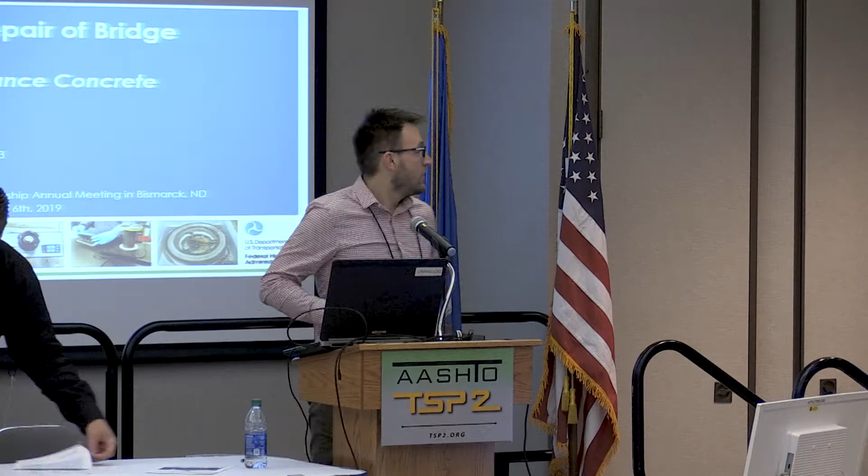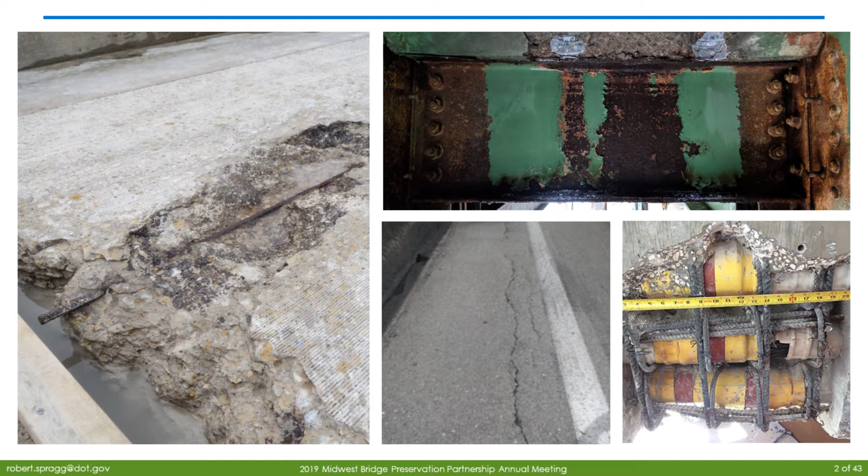So I'm looking forward to sharing a little bit about what we're doing with ultra-high performance concrete and bridge rehabilitation and maintenance activities. But just to start off a little bit, here's some pictures of what we're going to talk about, or some technologies. We're going to show some applications. So if you have things in your bridge inventory that look like this, this presentation might be interesting to you.

Just a quick overview, we're going to talk about what is UHPC really quickly. We're going to talk about how it's been used in some particular applications. We're going to delve into some specific applications with some pictures, and then talk about resources if you have questions of who you can contact that can help you.

So UHPC is made with traditional constituent materials, ordinary Portland cement, some supplementary materials, fine sand and fillers, water, admixtures. Most of this typically comes in a prepackaged blend from a material supplier. It will have some kind of optimized particle packing, so it's not just, you put all this material into a bag and sell it. There is some development that goes into making sure that this is an effective material.

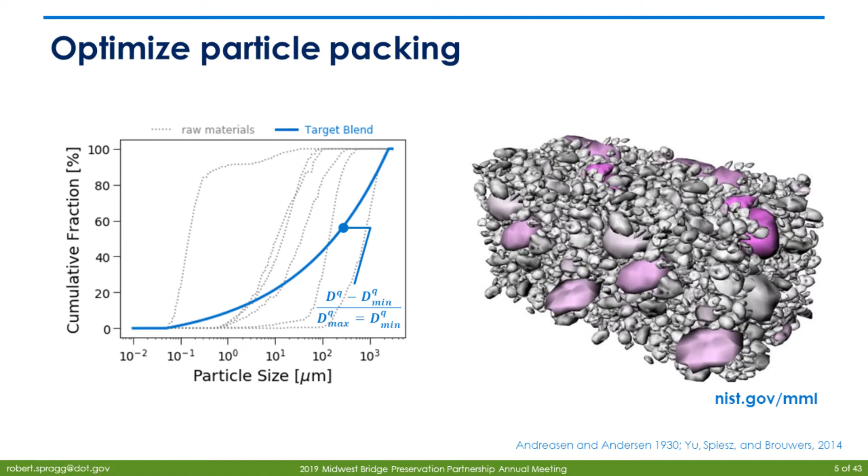It is available from a wide range of commercial suppliers, so this is not something that you would have to make yourself, or that you would have to contract with a local university to. I mean, there are people that have, but you wouldn't have to develop your own mix. There are commercially available mixtures. Here are some typical price points of these. So these are material costs. These are not necessarily bid line item values.

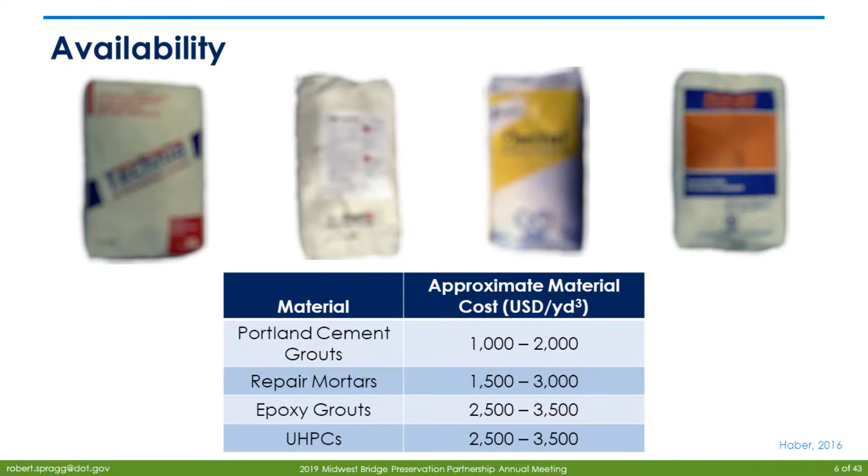So I'll caution you, if you look at a prior contract, or if you talk with someone that has used this material on a prior contract, they'll typically say, oh yeah, but the bid line item was very high. Sometimes that includes quality control, mobilization and stuff like that. But from a materials point of view, it's very similar price points to materials of other classes.

So some general properties of UHPC. I know this is a text-heavy slide, but specifically we're going to stick to the bolded items, which make UHPC an advantageous material to use in the applications we're going to talk about today. The high compressive strength, the high sustained tensile strength, the good bonding behavior, and then engineered flow properties.

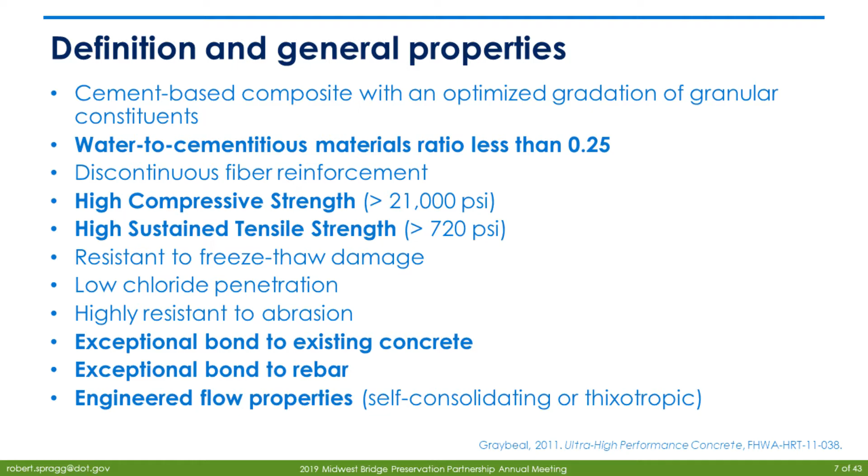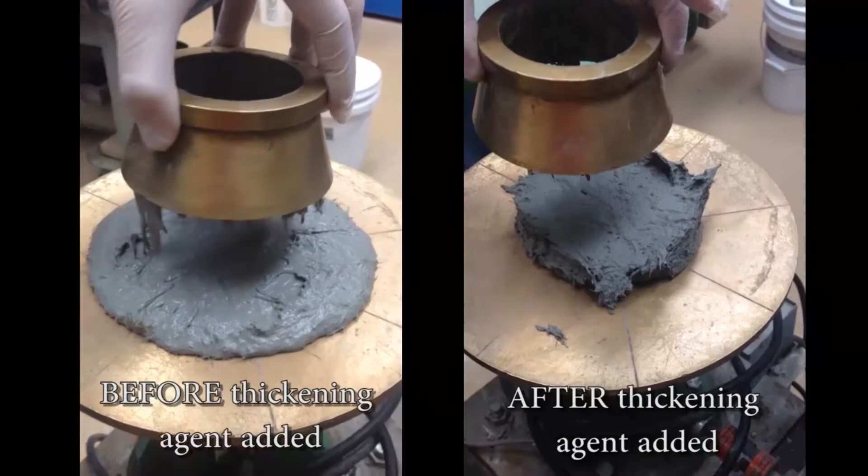And what I mean by engineered flow properties is this video here. So depending if you want your material to be self-consolidating, that's an option, or if you want a material that only moves when you provide some external energy or some kind of vibration, let's say you're doing a deck overlay that has some kind of cross elevation to it or cross slope, that's an option too.

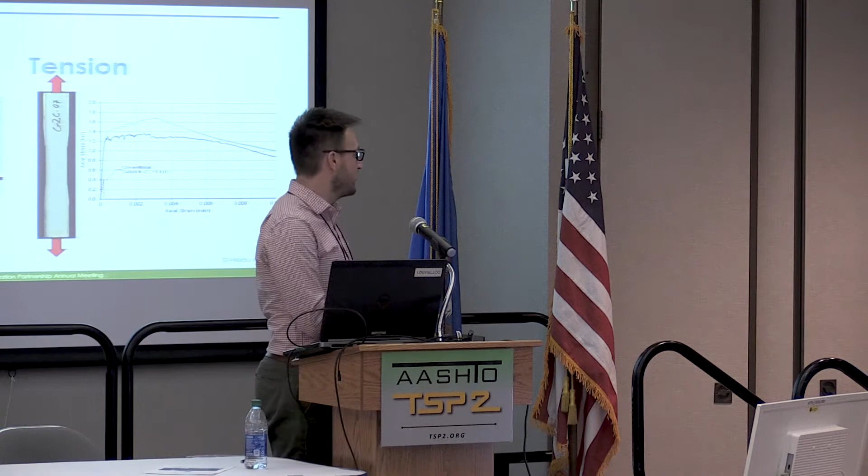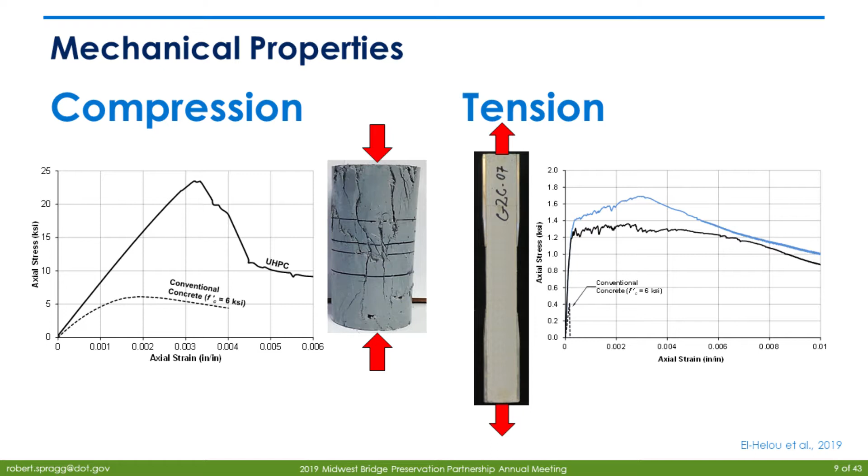Mechanical properties are pretty self-explanatory. Higher compressive strength of around 21,000 PSI, sustained tensile strength, which means it's able to reach a value of around 700 PSI, and then able to sustain that over a large range of deformation.

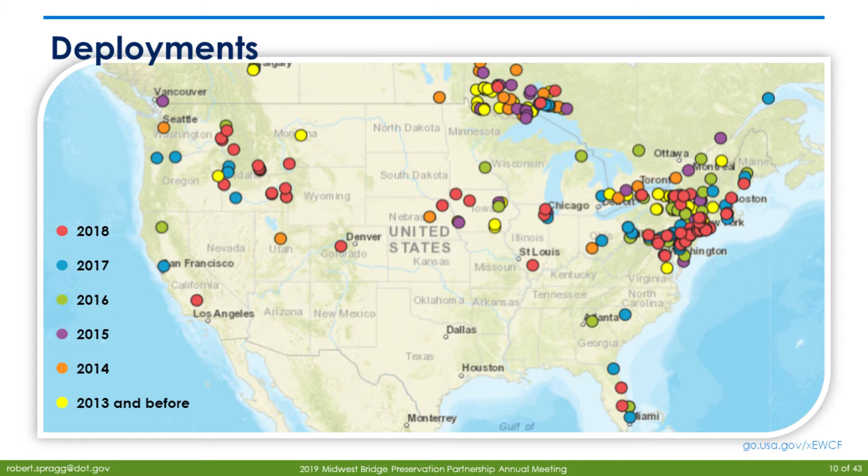So where has UHPC been used in projects? I was actually talking to some people yesterday. They've used some UHPC. They show up on the map here. They would say it's questionable whether that was a successful project or not. But it has been used in around 200 projects across the United States.

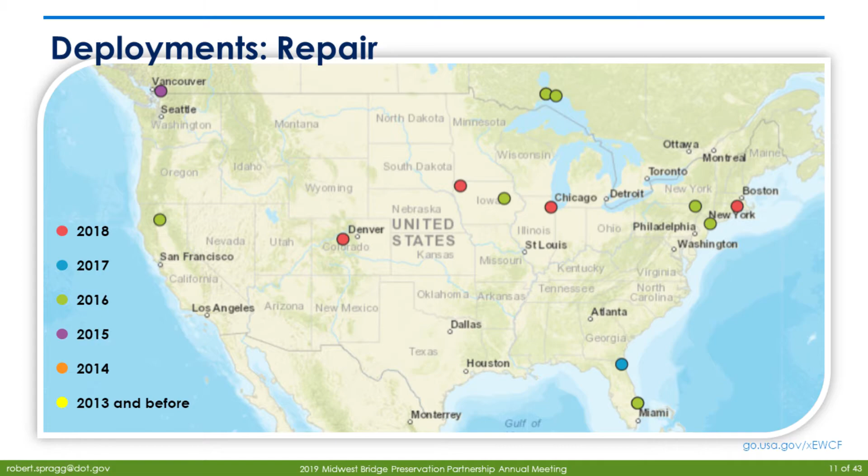But when we look at new construction versus repair, there's a lot less projects where it has been used in repair applications. So my presentation today is going to focus on repair applications of this material. So I will say that just because it's unique does not mean it's useful. So take in what I'm sharing with a little bit of a grain of salt. It might not be the solution that is the best for you, but it is a potential solution.

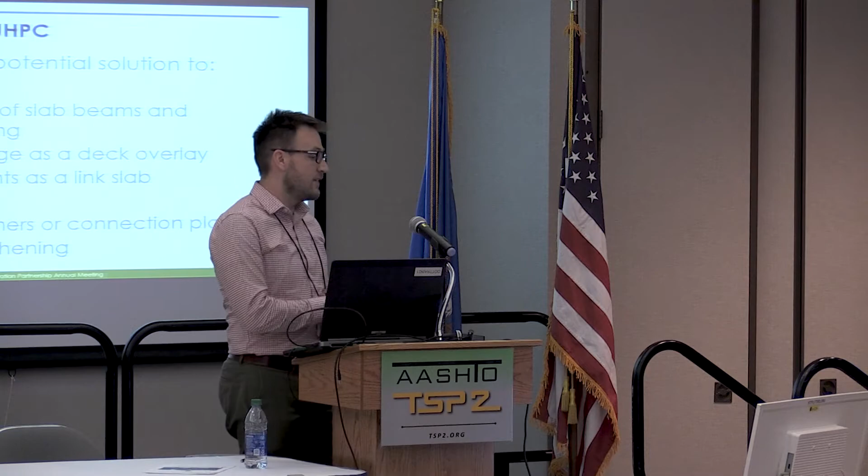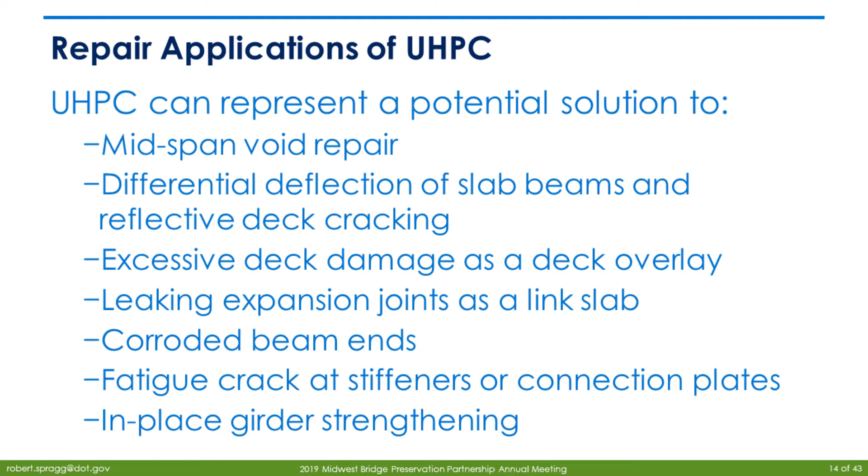Another way that you could look at it is it might be a new way of doing things. So we're going to go through this list of potential solutions. In interest of time, I'm not going to really go with the design methodology or things like that. So if you have any particular questions, you can feel free to contact me or someone else on the project team. Contact information is at the end of the slides.

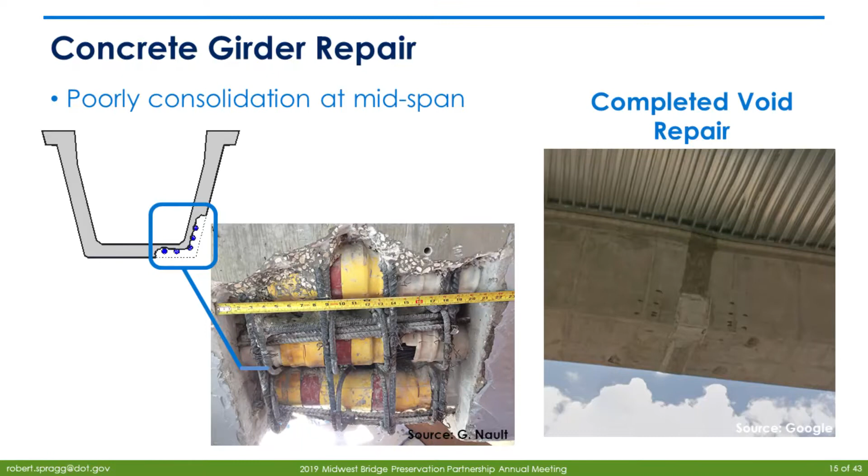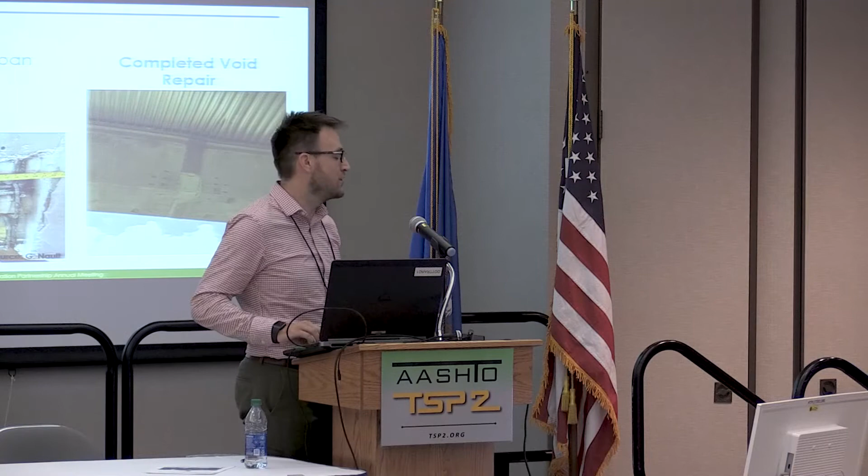So the first application is looking at poor consolidation around the midspan of a box girder. Here, this was formed up with plywood, and then UHPC was kind of poured in here. The benefit here is that you have good bond, so you wouldn't necessarily have to try and get in there and roughen your surface or anything like that. So the UHPC would provide good continuity there. And then it also would flow very well, so you wouldn't have to worry about trying to provide some external vibration or anything like that to get consolidation.

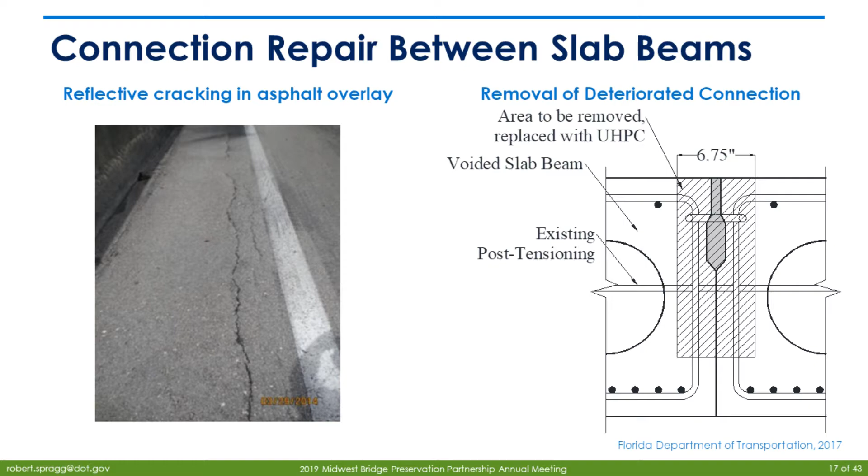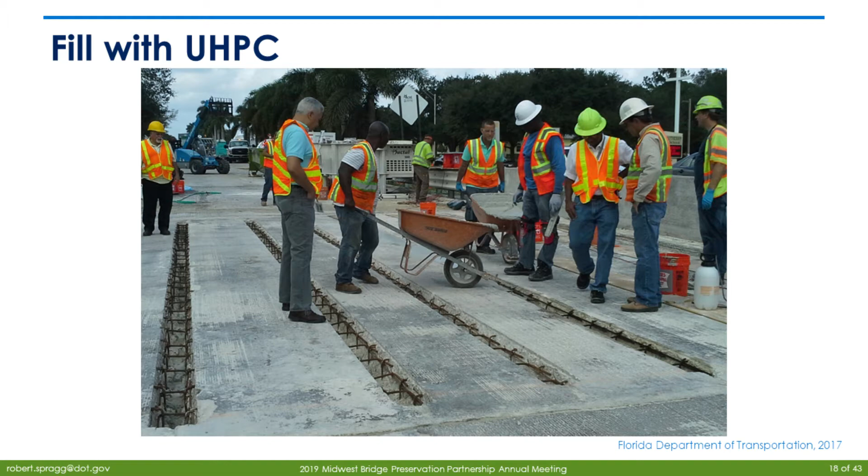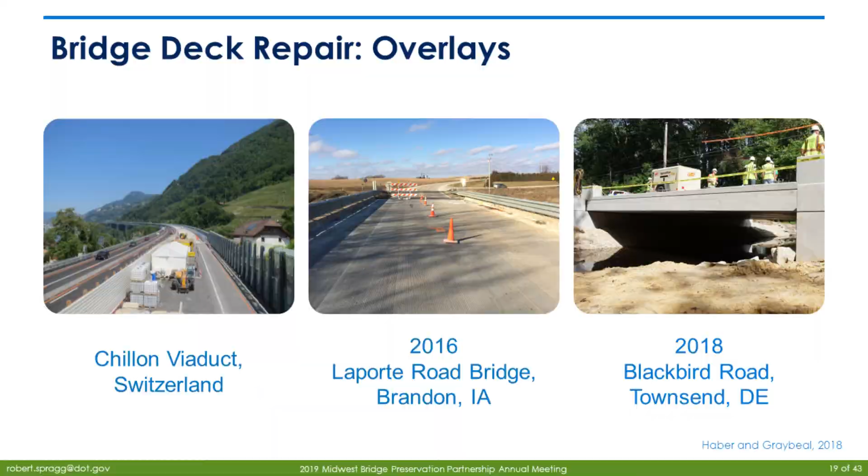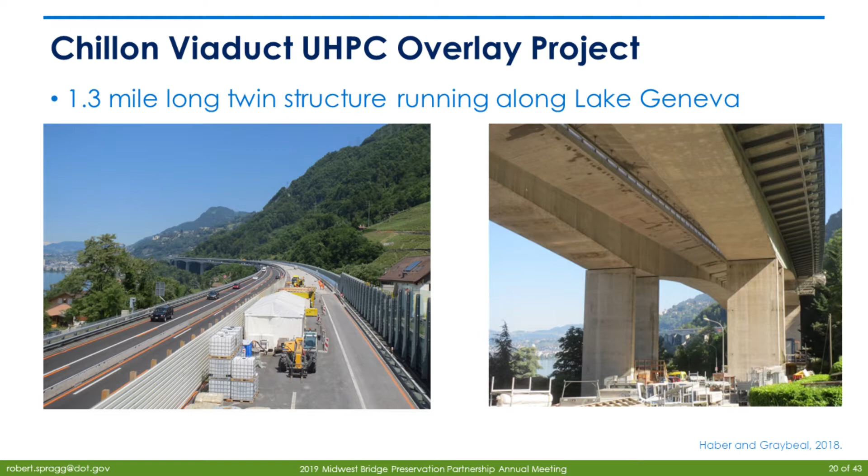Bridge deck overlays are another common application of UHPC. This technology has been pioneered in Europe, and has probably been used on over 30 bridges. One thing that I'll say is that Europe tends to have some strengthening along with their typical application, whereas most applications in the United States have not necessarily focused on strengthening, but just providing a durable surface on top. So this picture here is from the Chillon Viaduct in Switzerland. That's kind of the popular one. Here's a cross-section of what that bridge looks like. It's very slender looking to me.

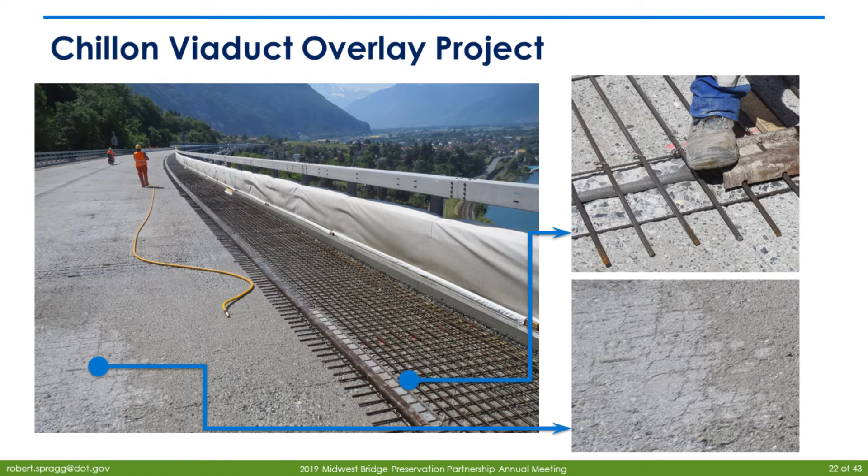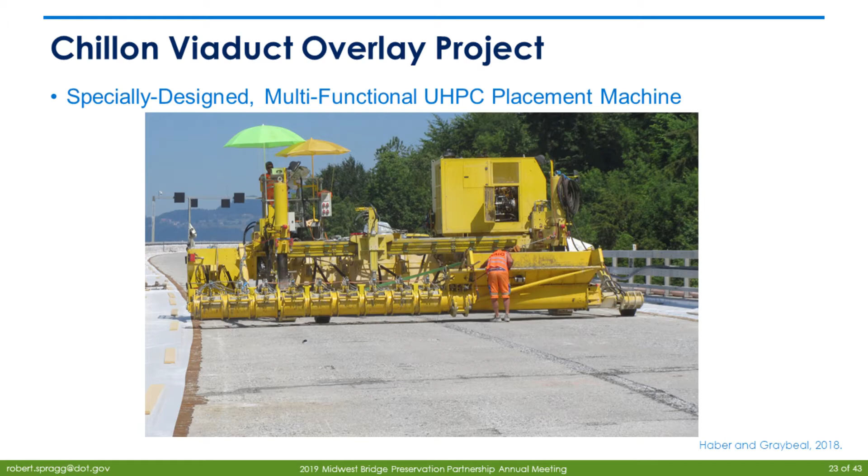So they put this UHPC overlay on the top to actually provide additional strengthening mechanisms. But the interesting thing about that is that they hydrodemolished this deck. They did put some additional reinforcement down, and then their placement machine was kind of like a slip-form paver is what it looked like. So they would actually take their UHPC and drop it in this end. Let me skip the laser pointer. They would drop it in this end, and then it would kind of move it across and consolidate and move it at the same time.

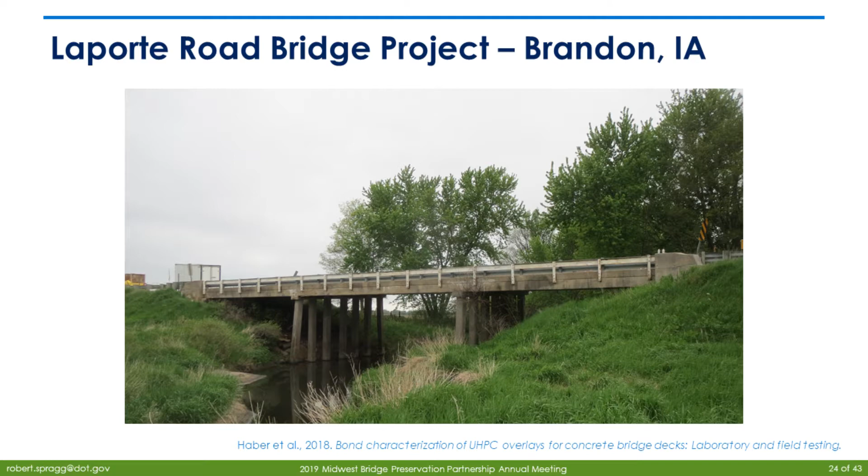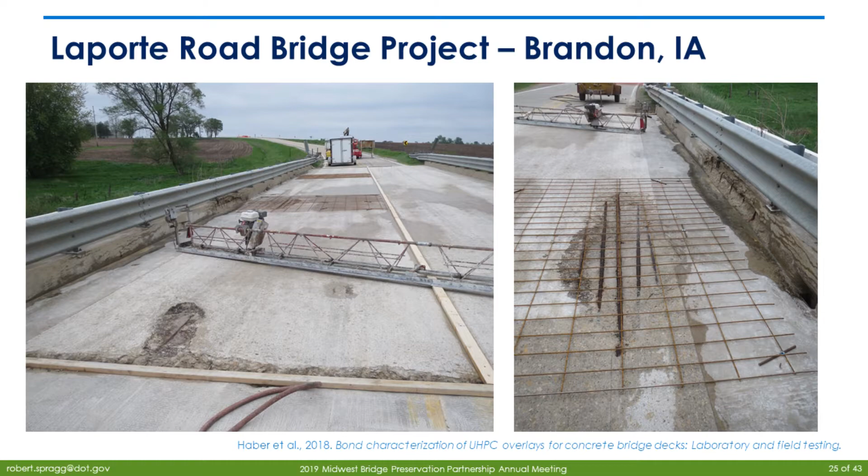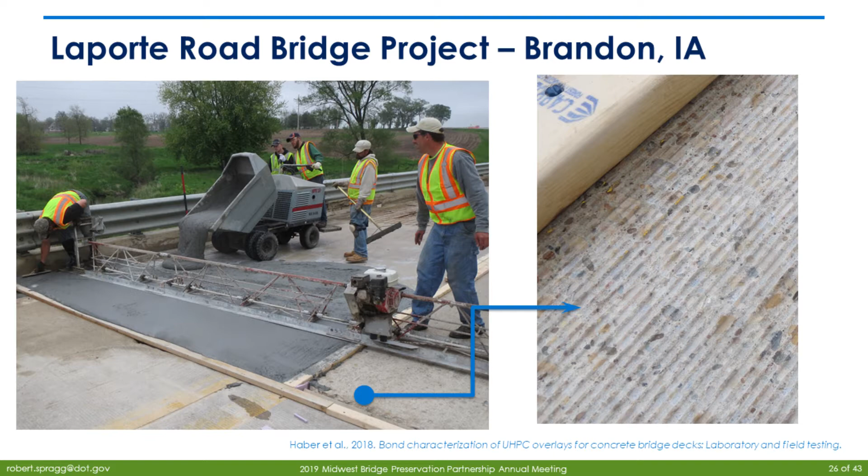In the U.S., our applications have not been as high-tech as that. So this is a local agency bridge in Iowa that had an overlay put on the top of it. You can see that the deck does have some damage. This is a very common sight, I think, for a lot of bridges. But basically, they formed up with strips of wood, and then would pour the UHPC on the top and consolidate it. So you would just buggy it and then also have this vibrating screed that they would just pull across the top of it. And this is what the final product looked like. So they did hydrodemolish the deck, and then they put the overlay on top, and then they diamond ground it to provide a wearing surface.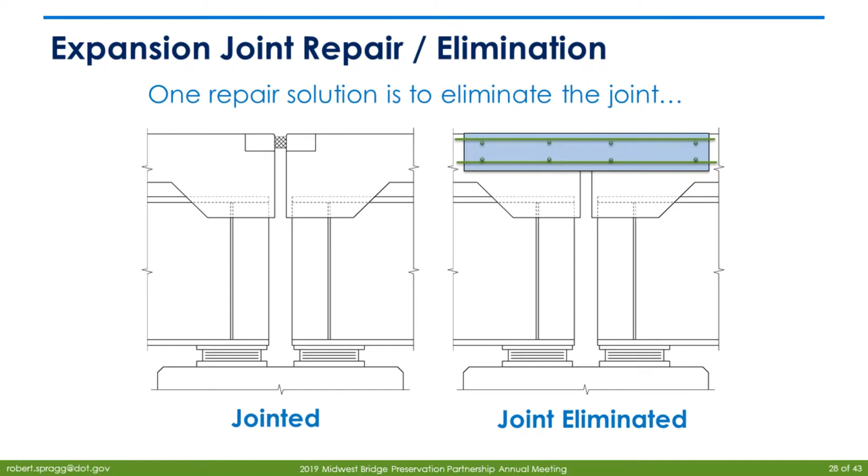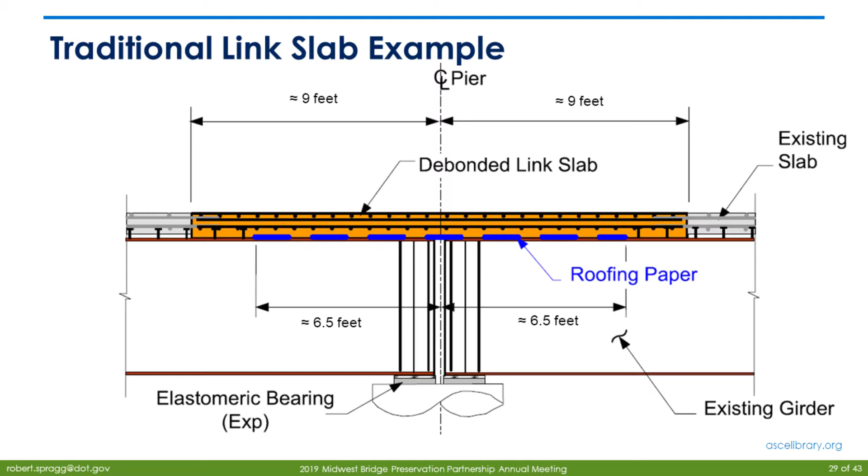Another application is looking at expansion joints, or more aptly eliminating your expansion joints using a link slab. So traditional applications of a link slab would take out that joint and then put in something that is able to sustain those movements, so something that has a little bit more ductility than a typical concrete. Traditionally, that would have to be relatively large, so around 20 feet wide. That's this traditional example here. When we move to UHPC, that becomes a little bit smaller, so we're able to make that about a 2-foot wide joint.

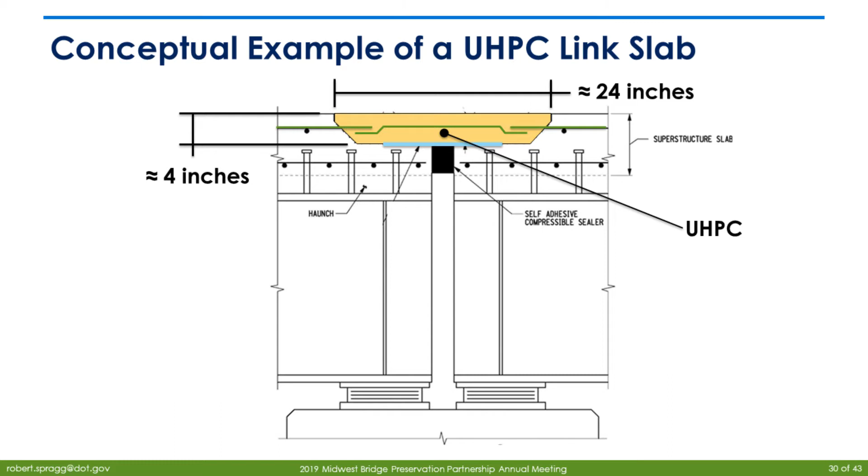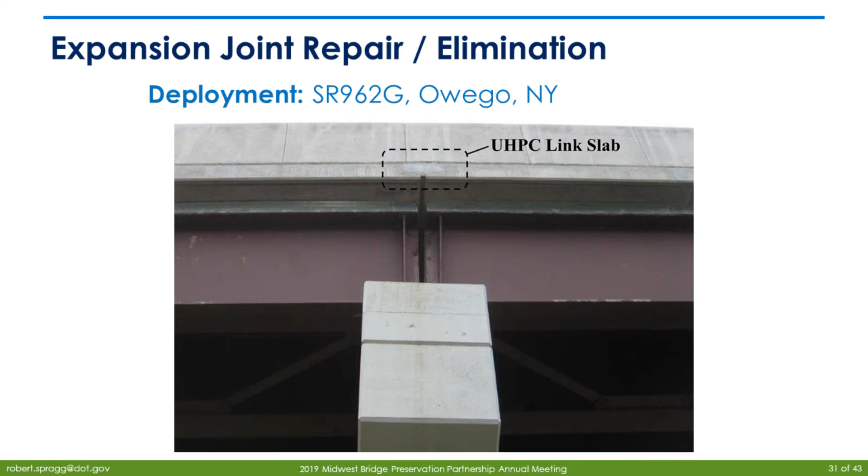It doesn't even have to necessarily be full depth, but it gets away from that joint that causes leaking on top of your piers. And this is an example of what it looks like on a project out of New York. So this is a UHPC link slab. You probably wouldn't even notice it was there unless you were looking for it, but it does help keep these parts of the connection and everything dry.

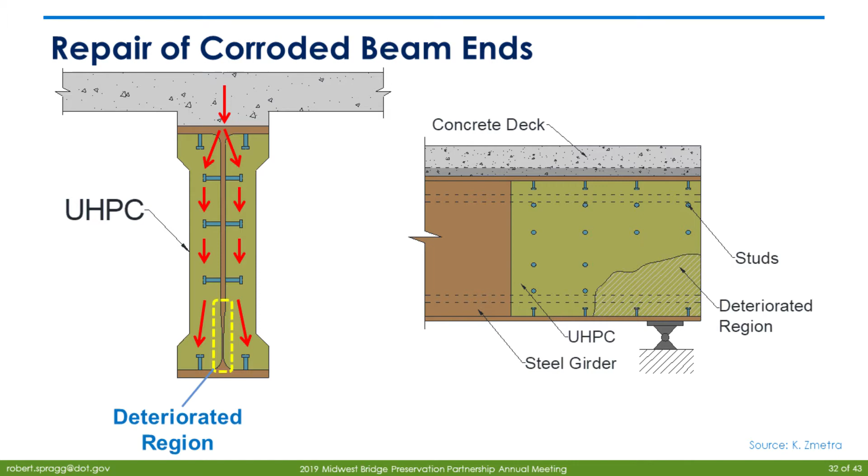Another application is looking at repair of corroded beam ends. So typically you'll have corrosion that causes a section loss down here. One particular application is applying shear studs and then forming up this area around the corroded end of the beam, and then casting UHPC in there, and that provides alternative load paths for your loads.

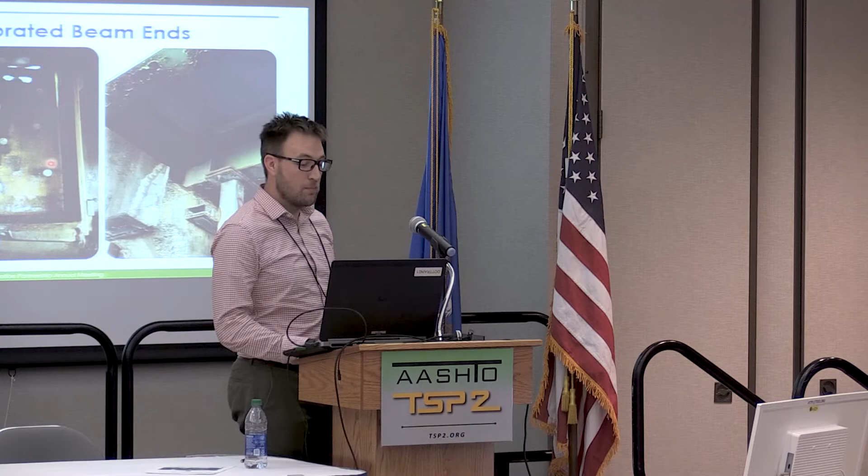This is what a picture actually looks like. So this is on an underside of a bridge, I think out of Rhode Island. So here we see this is the damaged end of the beam, or the corroded end of the beam. Shear studs were applied, and then finally, lighting is a little bit difficult here, but you can see that that panel is there, right there at the end of your beam.

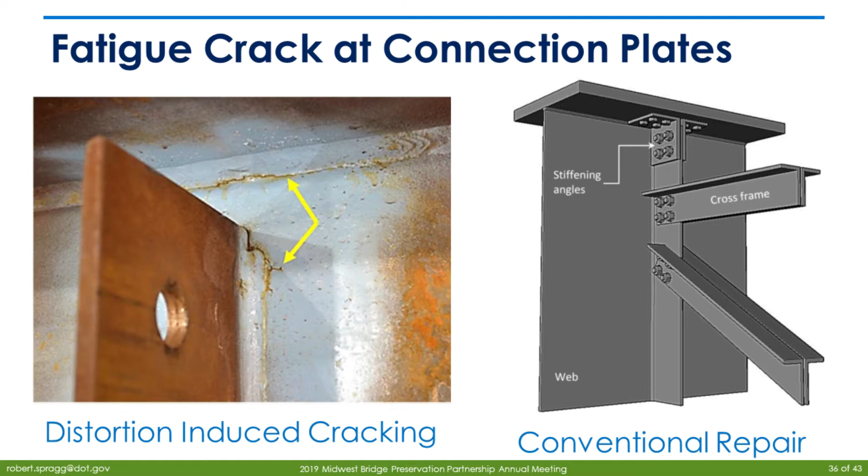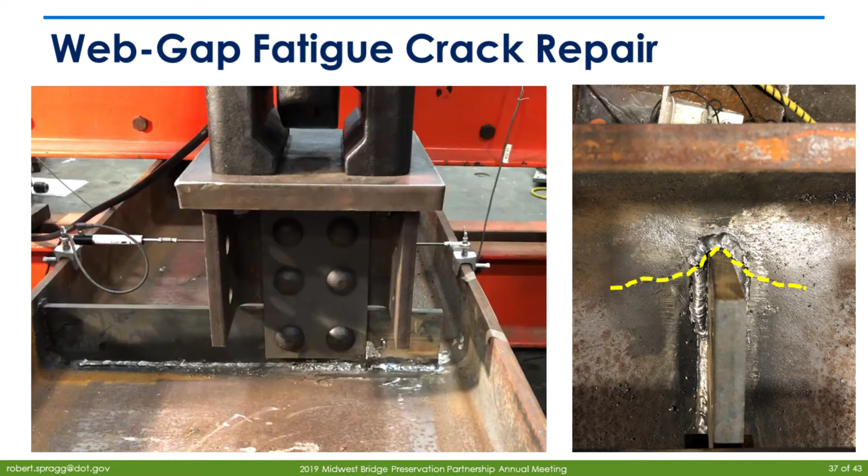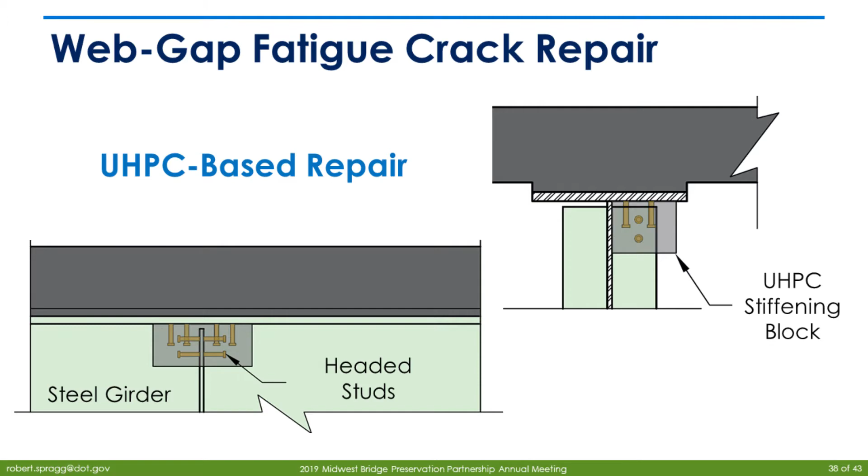One particular example, you could use a stiffening angle, but the challenge is that then you have to kind of come through the top of your deck to get to your top flange to bolt on those, which could be a little bit difficult depending on where you're at. One of the ways that we looked at that was we created these damaged samples in our lab with these fatigue cracks. And then the repair technique that we're going to do is looking at how we can use UHPC stiffening blocks with these shear studs that we shoot onto the top flange and then also onto the web.

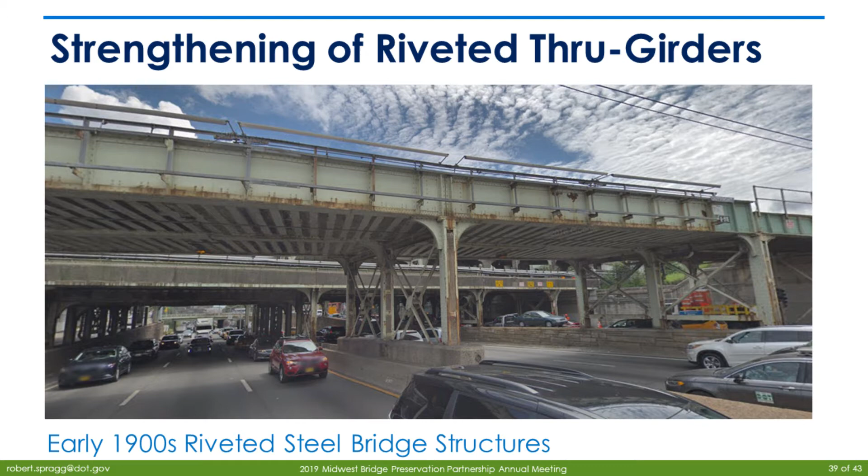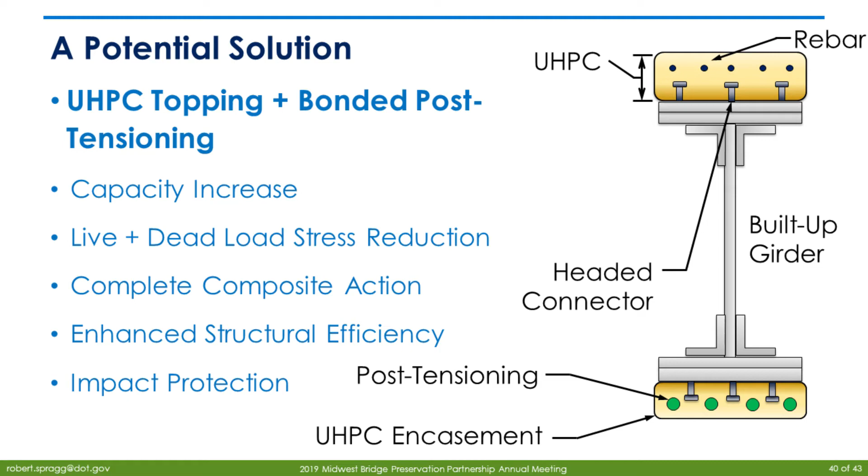Okay, so I think this is the last application. This is looking at strengthening of riveted thru-girders. So these are built-up sections or built-up plate girders. And really we're looking at using a combination of post-tensioning rods and UHPC toppers to increase the capacity, provide some stress reduction, enhance structural efficiency. You would cast UHPC on the top, form it up, and then also you would post-tension on the bottom that you would encase in UHPC.

I guess that was relatively quick, so sorry about that. But if you like some of these things that you see, if you think that these might be able to be used on some projects, or you would have an interest in talking about them, you can check out our project website. You could also Google it. Hopefully we're working on some design guidance that we're able to release, hopefully next year. If you have a particular application and you think this might help you out, feel free to reach out and we can work with you.

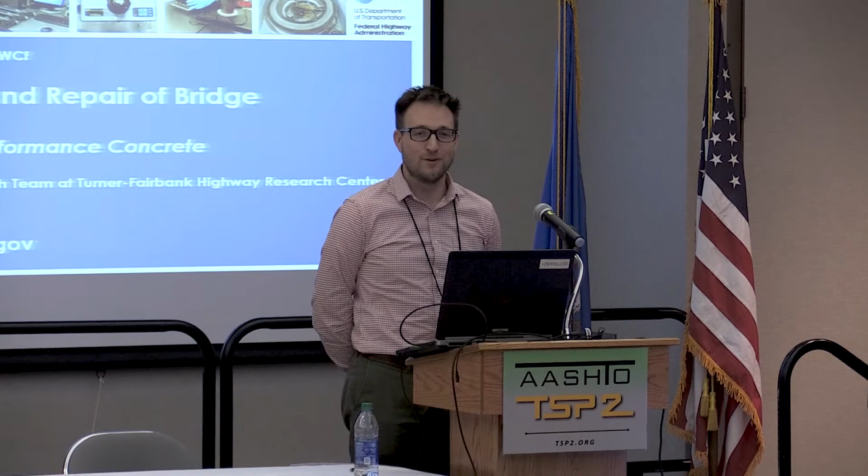I just was wondering about gusset plates on historic bridges. Taking out a gusset plate is not an easy thing to do, but we're doing it on one, but it's always a thought. Can you replace it with a block of UHPC and handle the same forces? That's a great idea. I think one of the benefits of UHPC is that if you could form it up, you could kind of do a lot of unique things with it, so that is a potential application, yeah.

The question is using UHPC for headers on expansion joints. That has been an application that they have looked at. There was actually a bridge that I toured in New York where they were doing that, so that is another option.

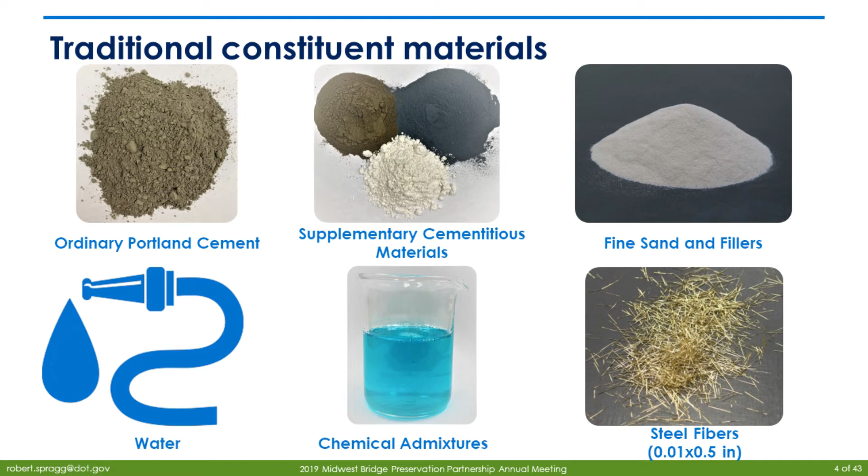The fiber, the steel fiber, if we go into Buy America steel, is that available? That's the popular question. So the question is whether steel fibers are available. For those that are in the know, you understand the question. But for those of you that don't, the main question here is these steel fibers are not traditional steel fibers. They're very small, 1/100 of an inch in diameter and 1/2 inch long. That's not a very common steel fiber, especially in traditional concrete, because the aggregate size is relatively large.

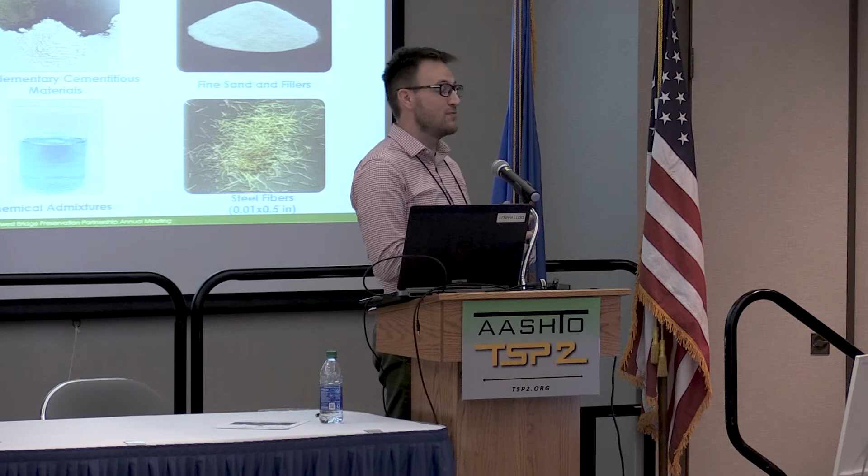The producer of these fibers has stopped producing them in the United States, which then doesn't satisfy the requirement that you have to buy American steel products. But there are some manufacturers that are trying to get into the market, and there's also some groups that are looking at potential waivers. That's certainly on many people's radar. I have heard from a couple UHPC suppliers that they have enough of this stockpiled for a foreseeable amount of time. Ask me next year. They do offer waivers. There was actually an email that was sent out last week, but there was like one waiver granted last year. Probably not.

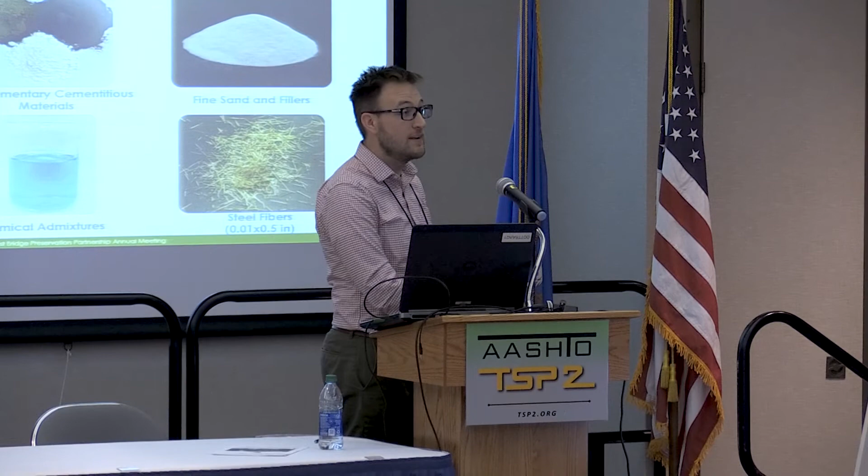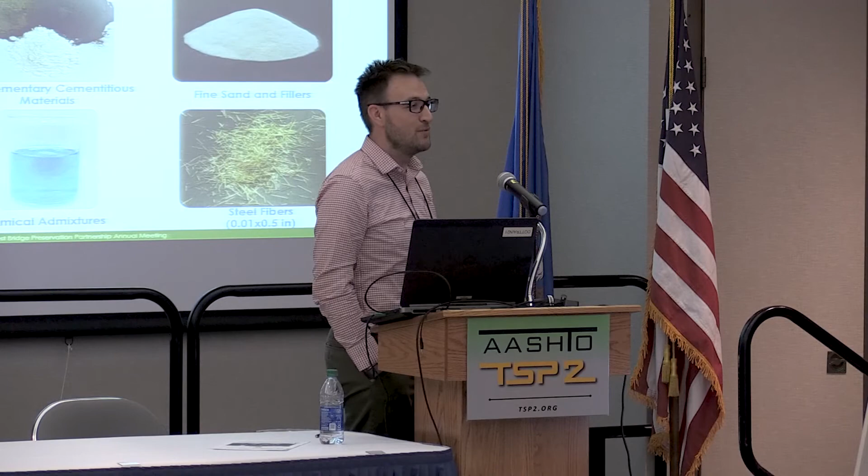You're applying this to structural steel. It looked like you needed studs in all cases. Do you have to have studs, or can you get decent bond behavior with just corrosion, surface imperfections if you get down to nice, clean steel? Sure. In most of our applications, we have utilized studs. There is some bonding that happens, but I would say you would probably need studs, which I know makes it a little bit challenging. In some of these corroded beam ends, there's not a lot of good material to put your studs onto, which is another challenge.

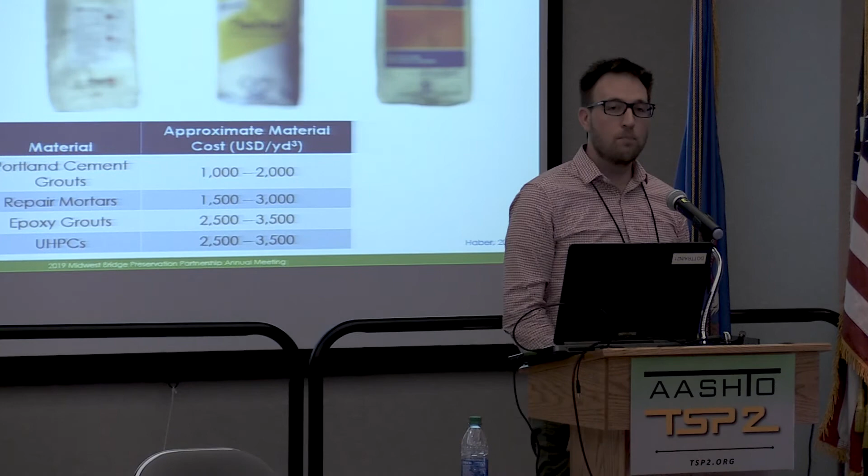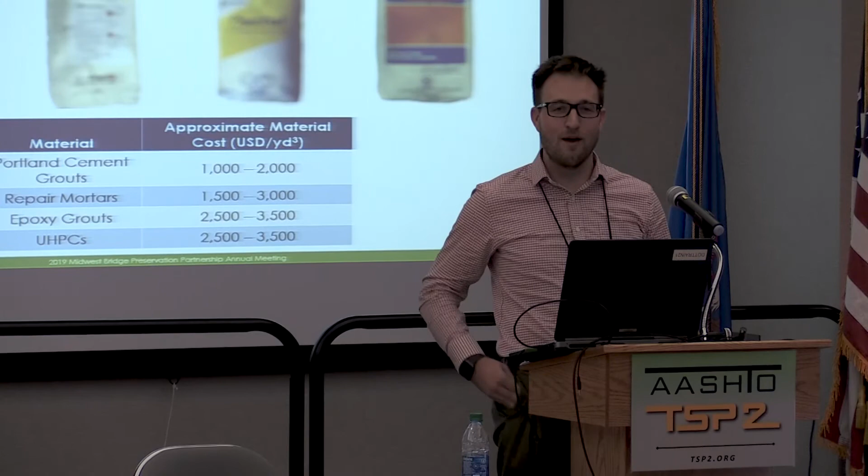Who besides Lafarge is supplying and supporting UHPC? Besides one particular material supplier, are there any others? So there are probably about 4 or 5 material suppliers that we work with, commercially available materials that you could call them up and they could deliver it probably sometime this week or next week. But then there are also a lot of proprietary groups that are working on helping people develop their own mixtures and things like that too. So there are a couple suppliers. I'm not sure I can say all their names, but I can chat with you afterwards and tell you some people. I'm certain I would forget someone and then I could get in trouble, I guess.

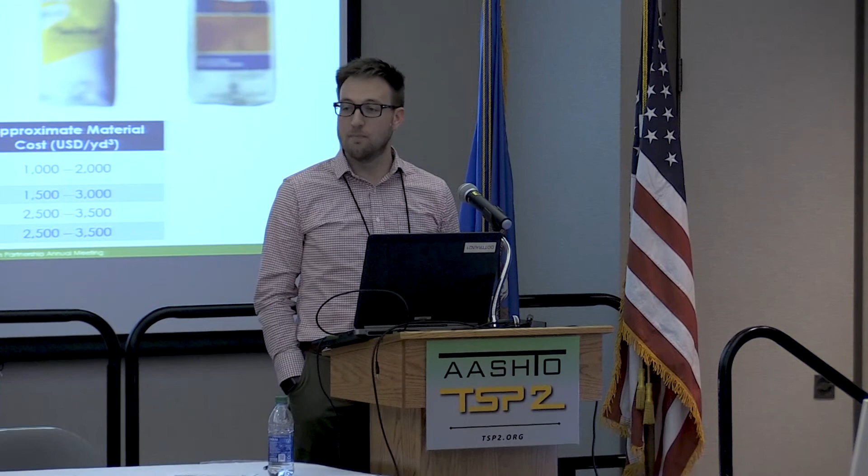Yeah, so the question is the steel fibers. That's the big sticking point with some of these materials. So in some applications, we're looking at using non-metallic fibers. In other applications, the fibers that are being produced are a little bit different than the ones that have traditionally been used, so we're looking to see if they provide the same level of performance. But then there's also suppliers that are saying that they would start producing these fibers if there was a market.

How do you control at the job site that they don't add more water than is necessary? Because I presume that if the amount of water is wrong, all the performance properties go down. It does need a lot of quality control with it. That's the thing that I mentioned about being careful about looking at prior bid prices, because a lot of those bid prices will include quality control from the supplier, because they realize that there is some sensitivity to these materials, so they typically send out their own people. So if you use this on a project, you have to be a little bit careful. Great, well, thank you very much.